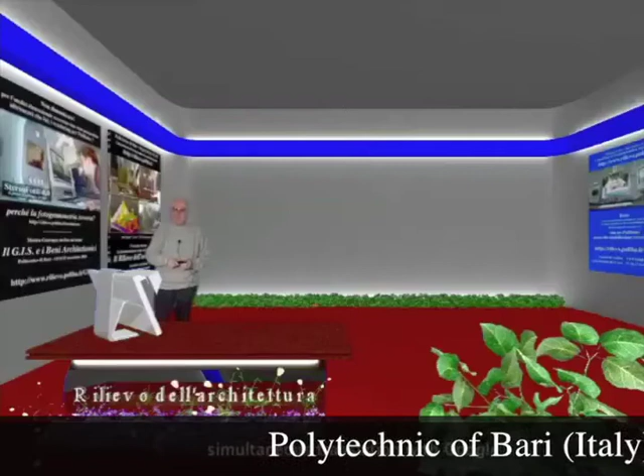This is part of the Relief of architecture course, which we will discuss in this presentation. It is among the subjects chosen by the student, and involves 9 credits.

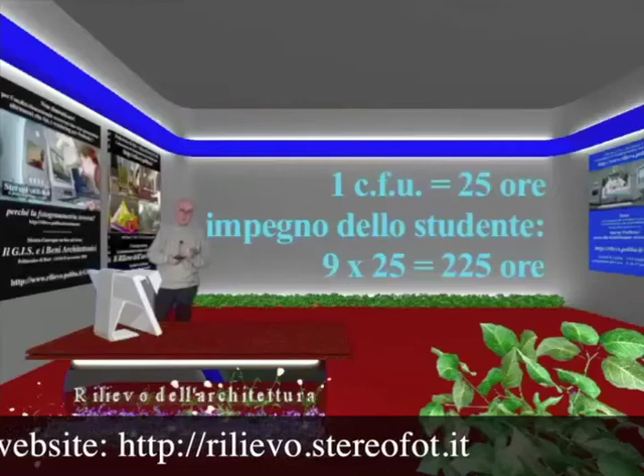I believe it's important to clarify the meaning of credito formativo, and the concept of relief first. As for the credit, I said 9 credits. This course involves 225 hours of commitment and learning by the student, because every formative credit is 25 hours. For 9 credits, we have 225.

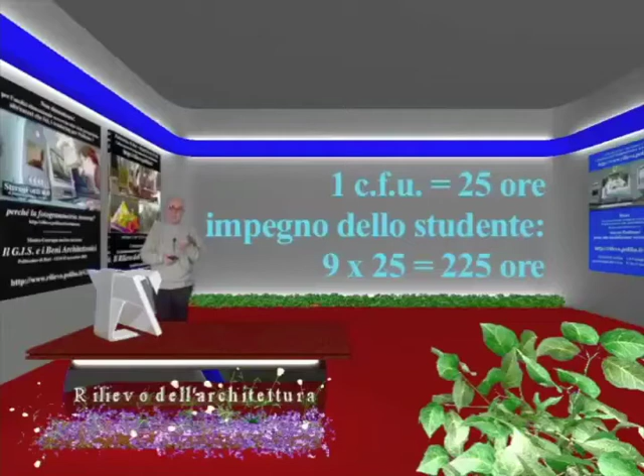This means that during this period of time the student has to produce something, because the credit points indicate commitment, production, work. Let's see how the course will be structured. We must say that the student can choose the subject of their work.

This is precisely in compliance with the concept of training credits, which were introduced with the reform for a simple fact: once, the engineering faculty came from two high schools, scientific or classic, so the basic training was uniform enough to be considered standard. But with students arriving from almost all schools, we now have a student population with very diversified basic training.

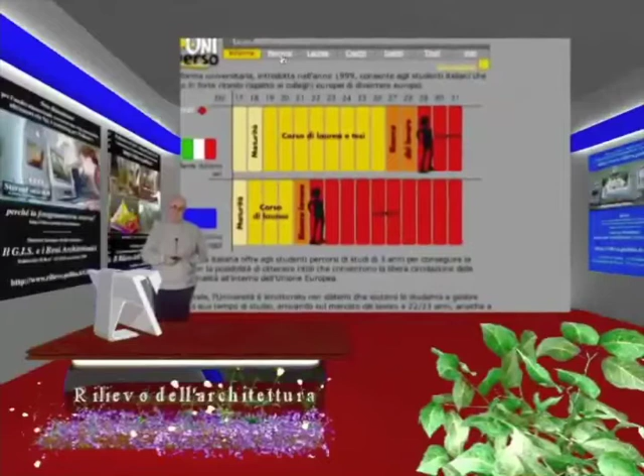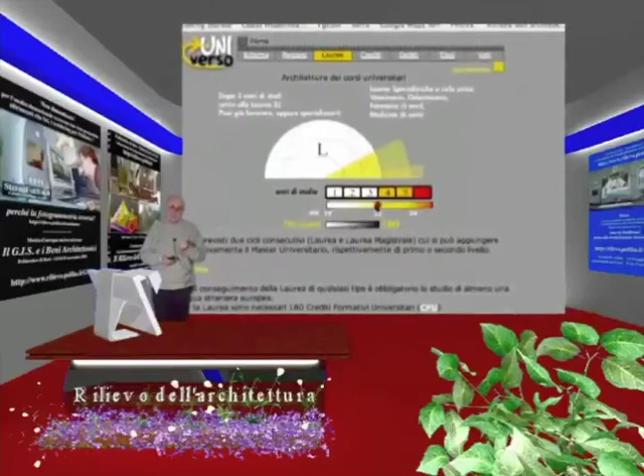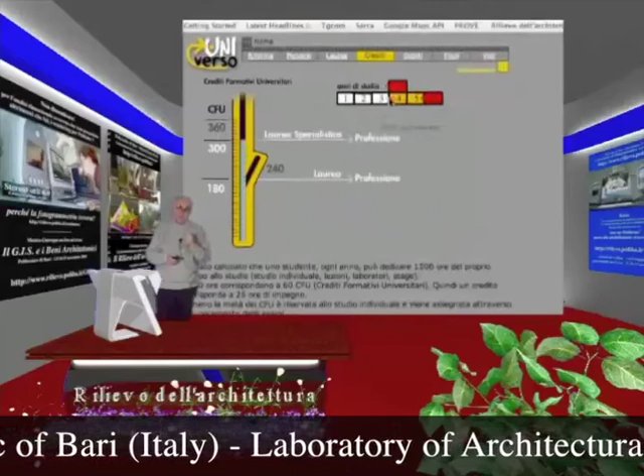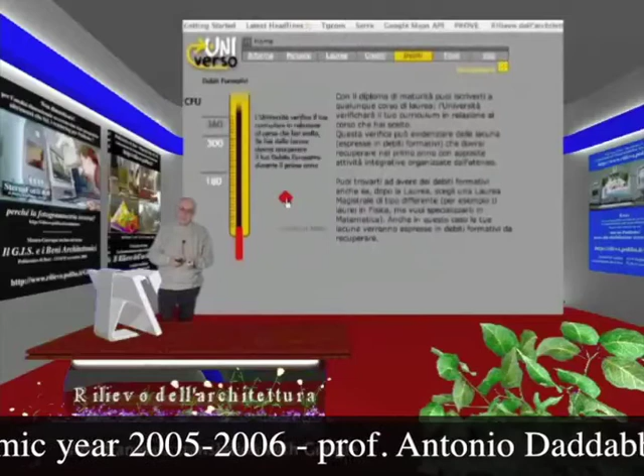Consequently, one cannot speak anymore of the ex-cathedra lesson, but of one-on-one lessons, of a personalized study plan. It is assumed that every student enrolls in university to learn something he needs for a future job, and this is very important.

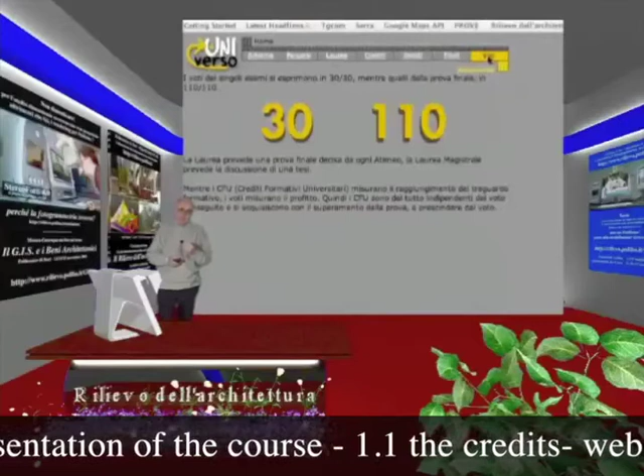If you choose the relief of architecture discipline, it is clear that you intend to use the survey in your future work, either as a user or probably also as a survey performer.

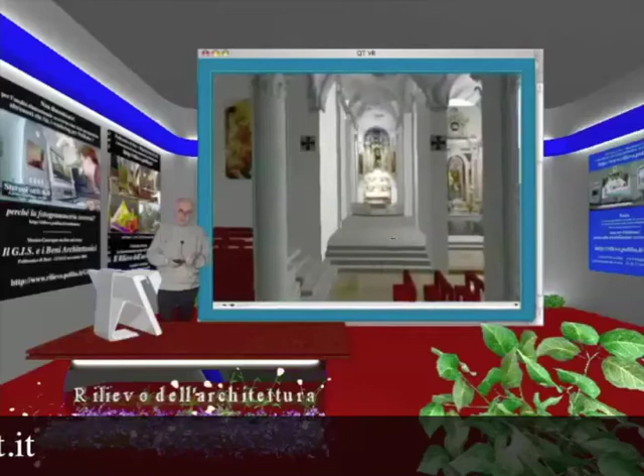It is evident that the relevant discipline includes several techniques, from manual to photogrammetric to laser scan, to stay with the latest techniques just available.

You can know photography or you cannot know it. You can know the photogrammetric technique or you cannot know it. Based on their knowledge, the student deepens one or the other method.

It is always assumed in an applicative way, that is, the student must apply these techniques to a survey of any subject they choose, not to choose at random, because it's assumed the choice is based on a need, on an interest in detecting that object.

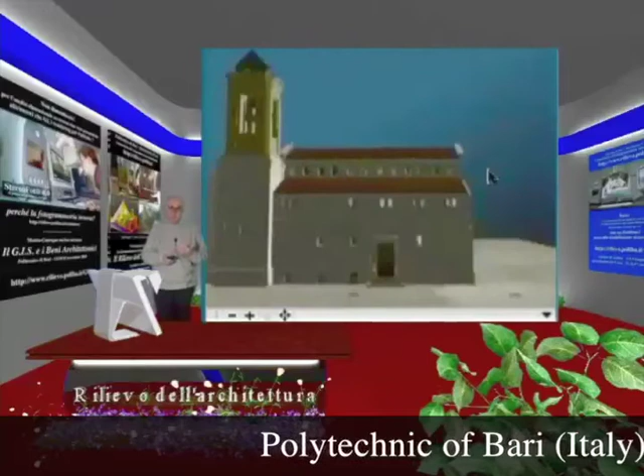Another point to clarify right away is that we can no longer stop at 2-dimensional graphics when we speak of relief. By now, technology allows us to represent a building in a 3-dimensional way, with respect for lights, shadows, colors, and to bring everything back with extreme fidelity to the existing structure.

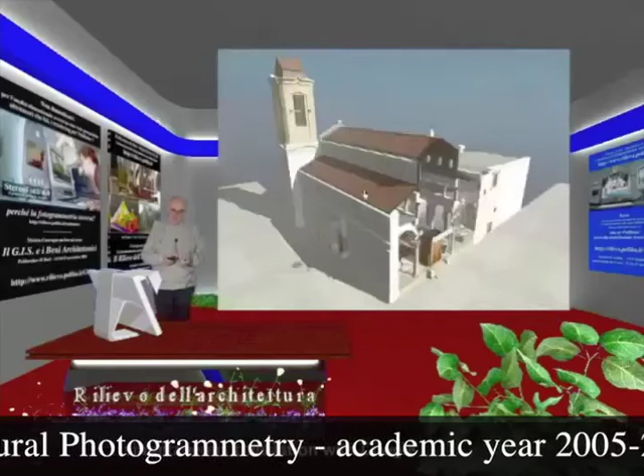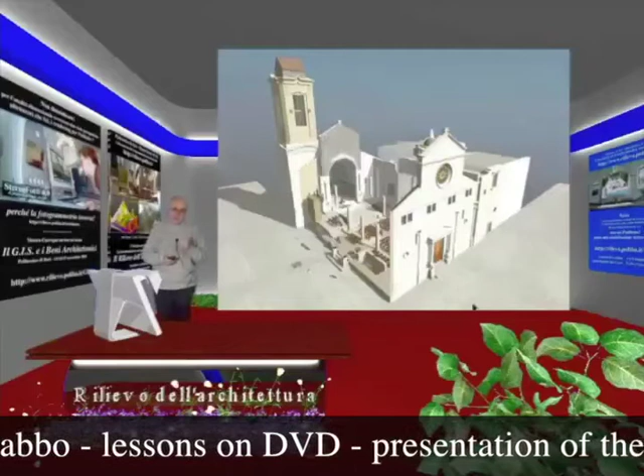We fix the basic concept of relief: we must understand the complex of information necessary and sufficient to make a replica of the building. I say replica and not copy, because it's assumed that in the representation I have to be able to reconstruct the building, possibly with the same methods used by those who made the original.